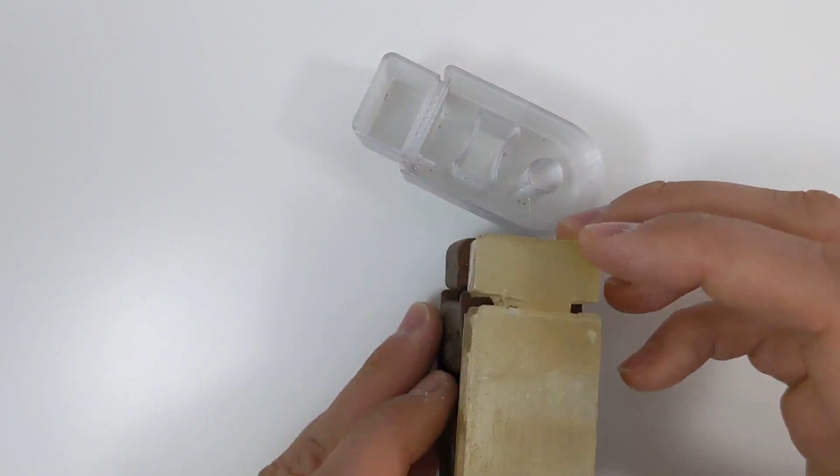And I guess I've given away the punchline. I did it. But I'm going to show you how to do it, because I also made one critical error in my design here. I made the part too thin. You can probably see right there. Oops, too thin. My bad. Most designs aren't perfect the first time, but I did it. I created a mold. Actually, I created this one first, and I cast this part out of it.

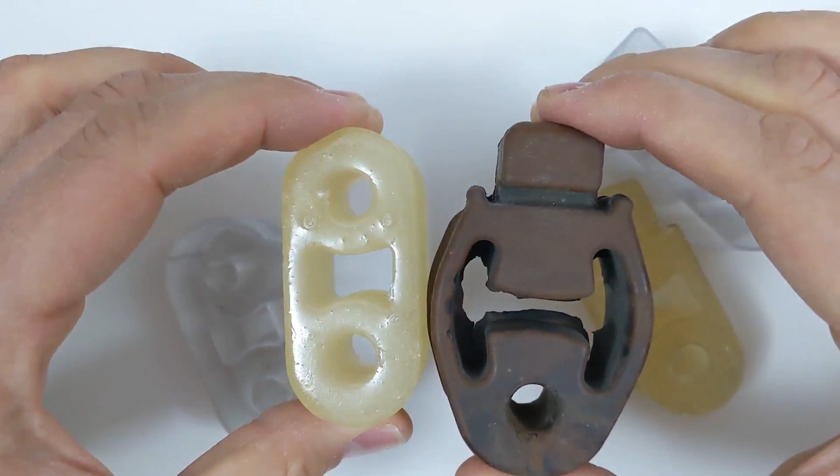I went and found a polyurethane mixture that is roughly the same durometer as this material, actually just a tiny bit stiffer. You've still got some nice flexibility in it, but a little more rigid, and I was able to make it a little bit more low profile, use a little less material than the originals did, because I want less flex. So I'll show you how I designed it, and then I'll show you how I printed it and poured the part, and here we go. This is the shell that I created for that rear exhaust hanger.

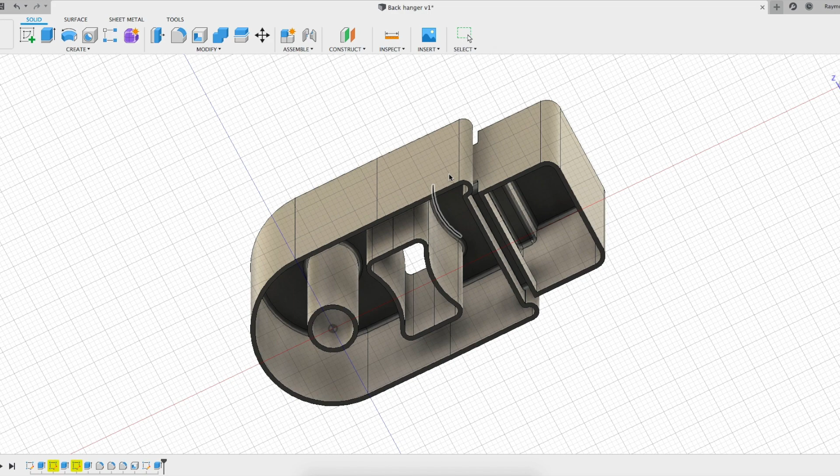Well, looks like a solid part if I look underneath it. There you go, you can see this is the shell. It's got those undercuts here for the portion that you slide up through the frame and then twist to lock in. So that's nice. I'll just roll it back so you can see the method behind my madness. I've got my main sketch here.

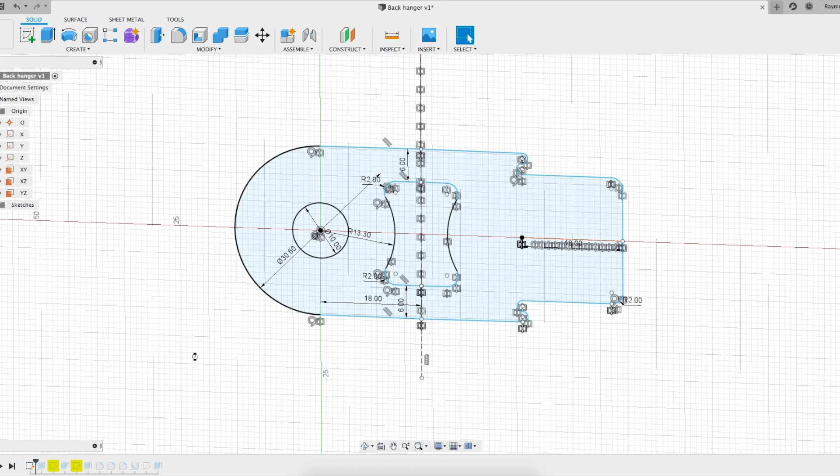I basically just drew out what the main profile would be for that hanger, extruded it, and put some radii on it. Oh, it wants me to finish the sketch. Okay, finish, and drag that over here. Got some fillets. I made that hole a little bit smaller for my second pour here, just to get a little bit tighter fit on the exhaust.

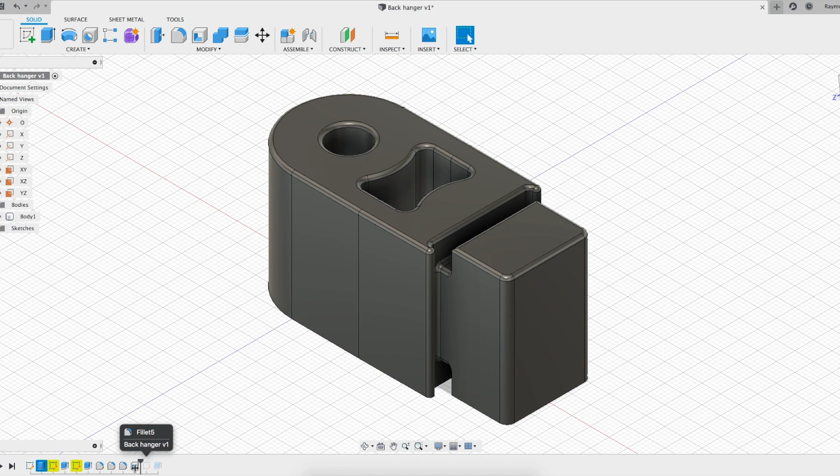And then once you do that, you select the shell function, and I shelled outward with a thickness of 0.9 millimeters. And I selected that main face up on the top, so it just punches that right out. So we've got our shell. But the problem was I've got this second cavity here, and when I'm pouring in here, I want to make sure that air can escape, and I actually would like to be able to pour there.

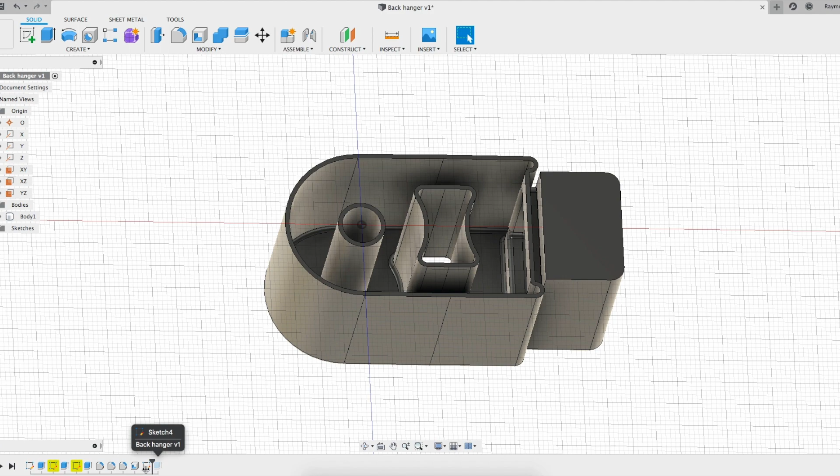So all I did was I created a sketch of that section, did a quick offset. The offset tool, for whatever reason, is hard for me to find. Right there, boom. And then I just did one more extruded cut to punch that section out. And if it will let me, that's right, finish sketch.

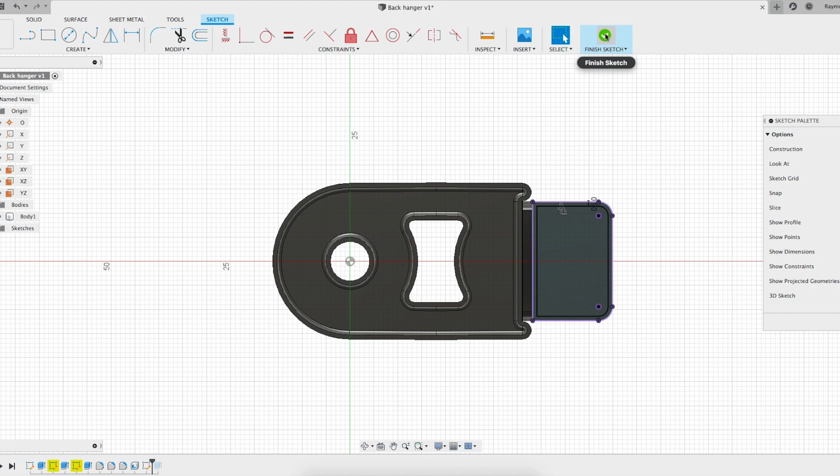I literally learned Fusion 360 last week. I'm always more of a SolidWorks guy. But anyways, it's been a great tool. Actually, I'm more of an Onshape guy, because as you can tell, I'm on a Mac, and Onshape is much better. You can't run SolidWorks on a Mac.

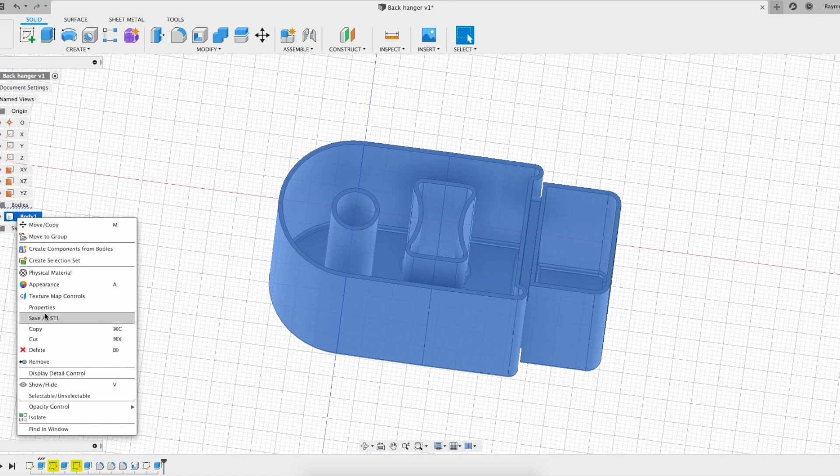Anyways, what I need to do now is save as an STL because I'm going to put it in my print prep software, and we'll just call it rear exhaust hanger 2, and pop it in the downloads. Then I'm going to put it in Cura. We've got our STL loaded of the new shell we're working on.

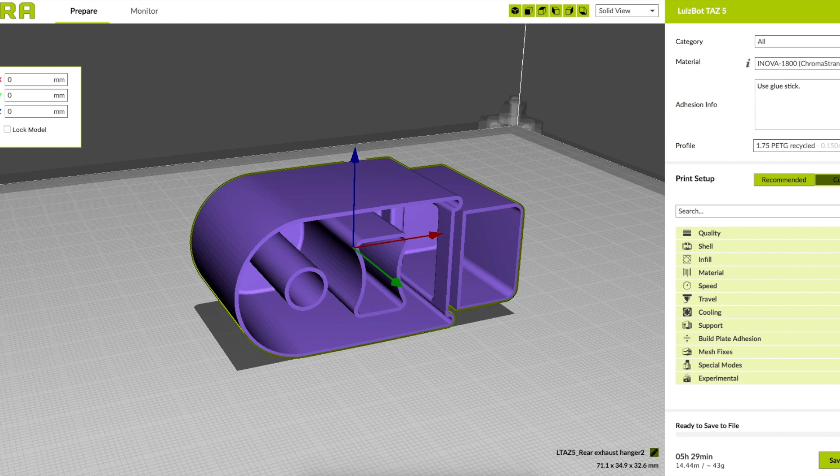This reveals that Fusion 360 in its default settings is one of those strange programs that thinks that Y is up, but you and I know better. So we're just going to reorient it. I'm also going to move it to a 45 here.

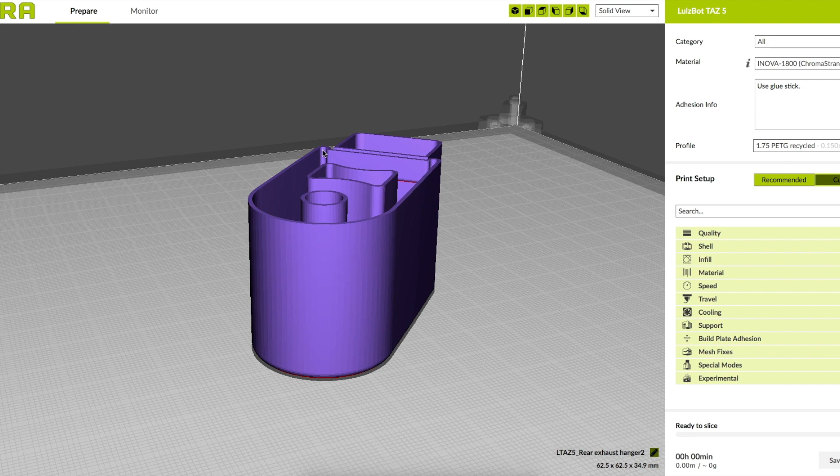And the reason I did that is because of the way Cura likes to arrange its support material. As you know, this bridge that we've got here is a big overhang hanging over in the air. It's going to have support material under it. I've already turned that on. But if you leave it the way it was oriented, it just creates these straight lines going across, and it is a pain to take out. So orienting it at a 45 like this is going to put those at a nice 45 degree, really easy to pop those out.

So a few small modifications. I just went with a chroma strand, which is a PETG, well, that's technically a PET copolymer, but I'm just using that as my base profile, and then I've customized it a little bit. One thing that I've done is I've upgraded my TAZ to run on 1.75 filament because it's just more common, more abundant. You can get more filaments that way. So there we go. Filament diameter I've updated to 1.75.

And then the other thing that I've done is increase that flow rate to 120. The reason I did that is to make the part waterproof. Now that I just did experimentally. I've printed a lot, so I knew, and I went ahead and tested it at 100%. 100% is the basic flow rate calculation: if you move this much, you have to spit out this much material, that Cura does to produce its G-code file. So giving it 120, it's going to be spitting out 20% extra material all the time that it's extruding and moving.

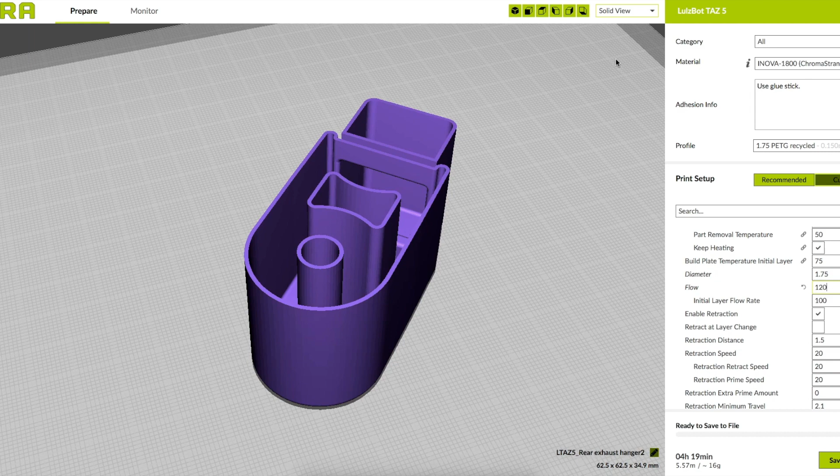The only other consideration here, let's go to layer view so you can see what that support material is going to look like. So we'll scroll down a little bit. You can see that support material right there, and this is what I'm talking about. Now you've got these nice 45 degree orientations. That's going to be a lot easier to get in there with needle nose pliers and just squeeze and pull that right out.

You might be wondering, with increasing the flow rate, does that make the walls a little bit thicker, a little oversized? Yes, but it's such a small amount. And in this case, we're going to be pouring an elastomer into this mold anyways. It's really not going to be enough to be a problem to us. And we redesigned and closed up that hole a little bit, so it should fit really nicely. So here we go. We've got our G-code file. I'm going to save that, toss it on the TAZ and print ourselves a mold.

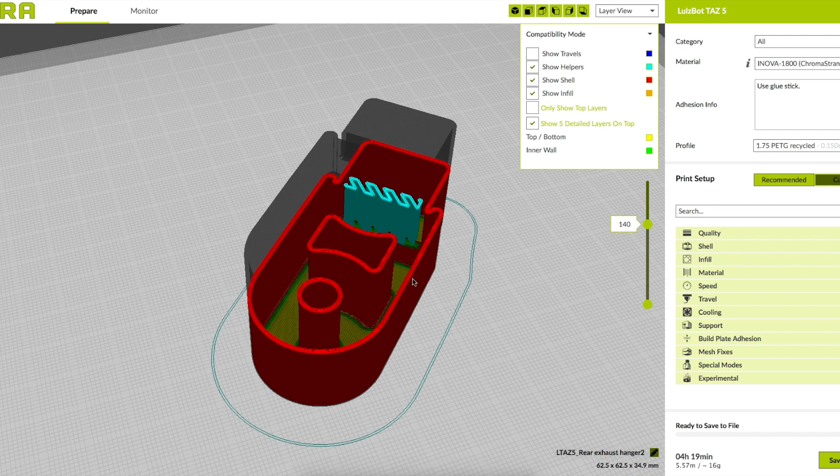So here's that 2-part polyurethane that we're using. It's PMC 770 from Smooth On. You can see it's 2 parts. You've got your part B and part A. According to the instructions, you use two parts of A to every 1 part of B. That's why it comes with 2 bottles of A.

That's pretty simple. So we're going to use that 2-to-1 ratio to design some pouring and mixing vessels, and I've done this in the past. We're going to go design that right now so that we've got exactly the amount of resin that we want to pour in this part at exactly a 2-to-1 ratio. Makes it super easy to get this just right and minimize the waste. Let's go look at that.

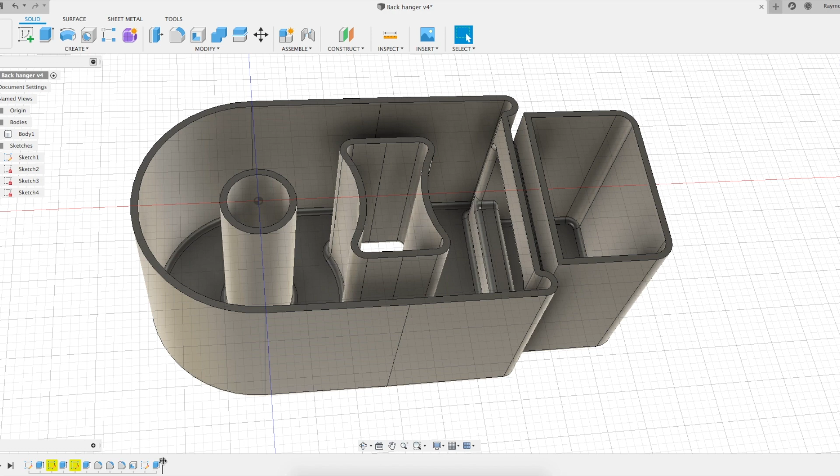The next thing, we're going to want to print one more thing, and that is the actual measuring and pouring cup. And we want to make it exactly the right volume. So if we roll back to just before we did our shell function, this is what the actual part looks like, right? So we want to know exactly what volume this is. That will tell us what volume of material we have to mix.

So I'm going to go to body here on the left, and then we go to properties, and you'll see we've got area, density, mass, volume, 4.352 times 10 to the 4th millimeters cubed.

So I'm going to write that down, 43520 millimeters cubed. I'm going to multiply that by 2 and do a quick bit of math, and we're going to start designing a measuring cup.

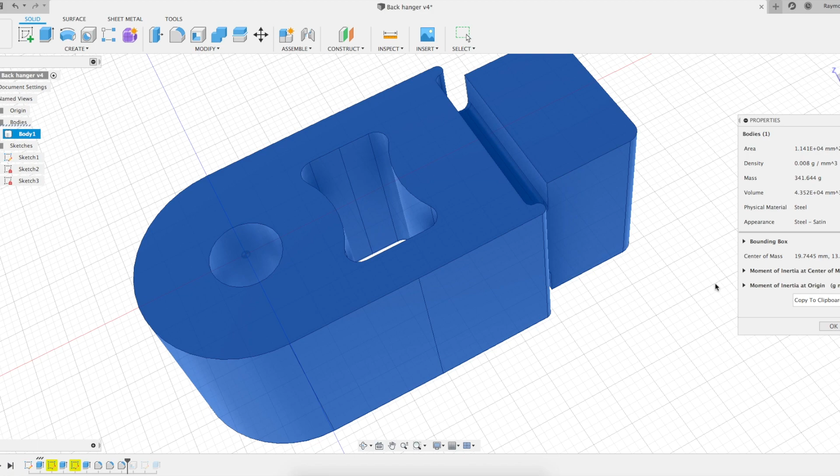Now, just as a reminder, you don't have to do this. As long as you have some kind of measuring devices, cups of some sort that will allow you to measure out 2 parts of part A to 1 part of part B, and you just want to wing it, just mix up however much you mix up, that's fine. I just found it to be a little bit wasteful, and since you only want to use how much material you need to use, this is a really easy and kind of cool way to measure out exactly how much resin you need to use.

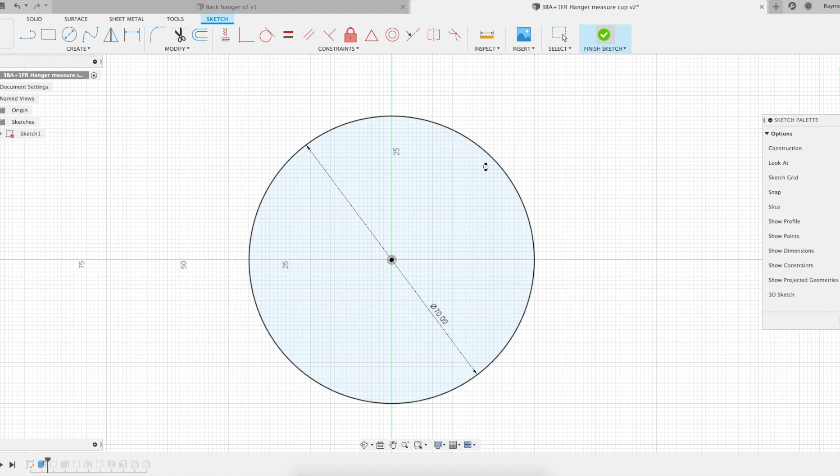So just showing you what I did here, made a simple sketch of a circle. It's 70 millimeters in diameter, and done. And then I extruded that to 50 millimeters, but actually you do a little bit of math, a little pi r squared, divide the volume that we just got. So the volume for the 2 hangers we're going to pour was about 87,000 cubic millimeters. Divide that by pi times 35 squared here, and we get a height of 22.6.

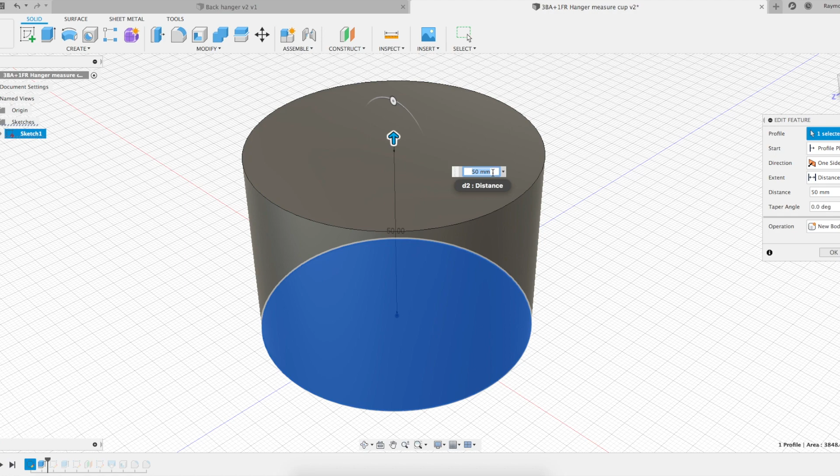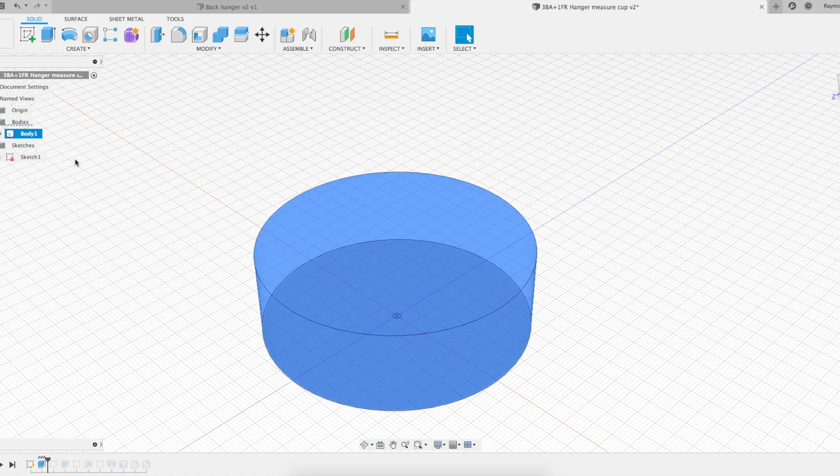So let's go ahead and do that, 22.6, and that is the amount of resin that we're going to need to use. Just to confirm, go to properties here, and the volume is just about 87,000 cubic millimeters. So our math is right on point. So that's exactly how much we need to measure out.

We want a little bit taller glass than that, or taller vessel. So I'm just gonna undo that. I extruded it to about 50 millimeters, so give it about double the height. It's so little material to print this vessel. You're gonna have to pour the 2 parts in, and then you're gonna have to stir it around. So let's make it tall enough for that.

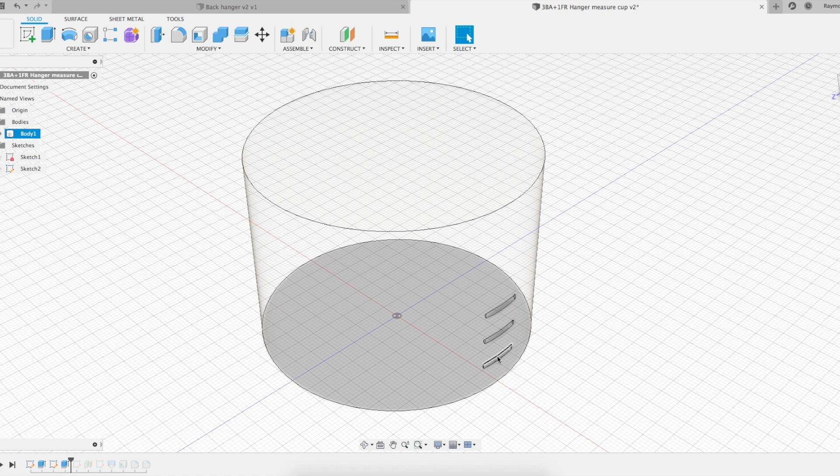I did a little bit of fun here, actually I'll show you. Firstly, we're mixing a 2 to 1 ratio, right? So 2/3 to 1/3. So what I did here, I'll show you this sketch. I just measured along the side, and I went up 7.5, 15, and then 22.5. Those are pretty nice numbers actually, that it came out to.

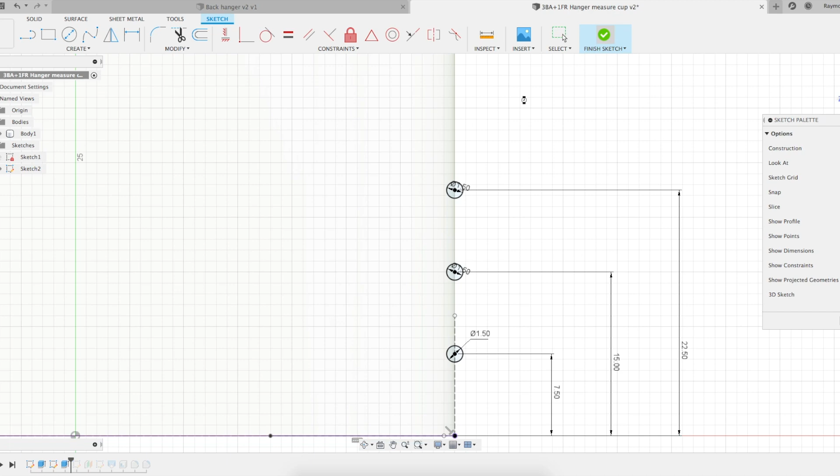And then I made these little circles, and as you can see here, I extruded those circles in both directions. Boom. Just so that it notched out the sides of the vessel that we're going to use. So now we've got those nice notches when we go to print that. I put all 3 just in case I put part B first. I'll just go up to there, and then part A up to there, or the other way around.

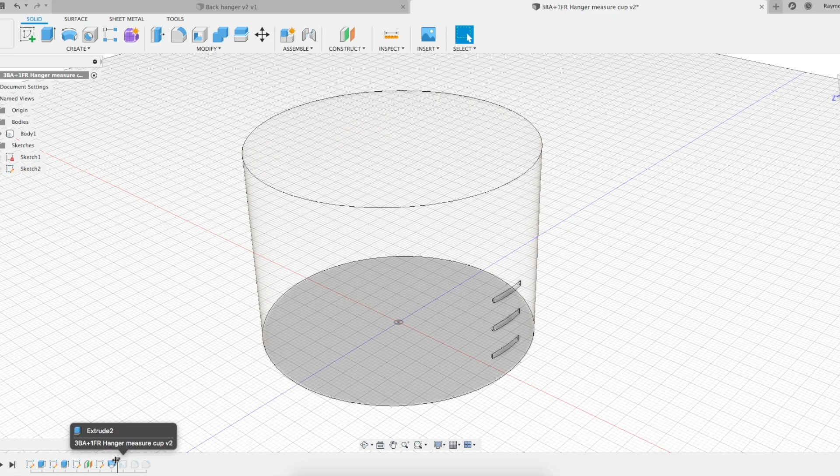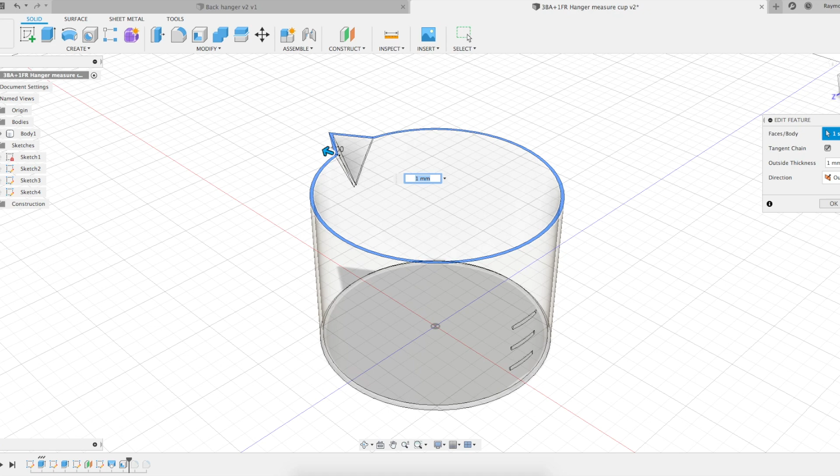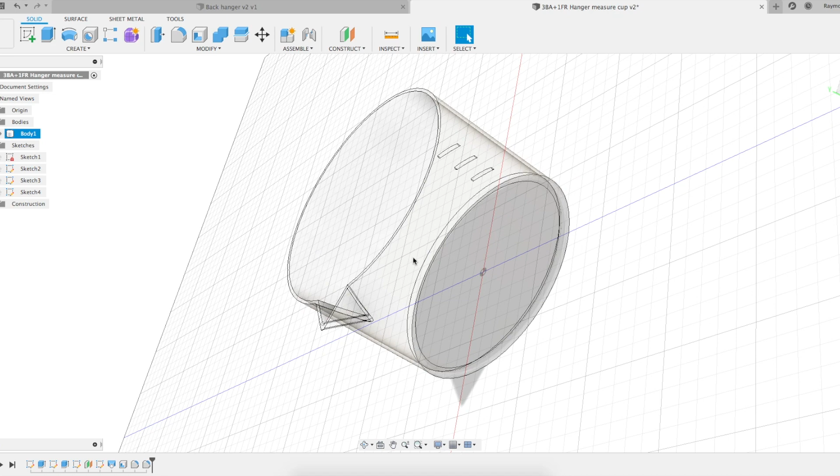I had a little fun here and put a little spigot. I just drew a triangle, a second triangle, I lofted between them, and then I added that to the shape. Now this is all one solid shape, but then you do a shell out. I did an outward shell of 1 millimeter. Since I have a 0.5 millimeter nozzle, I just want a two pass thickness on all of the walls. And then just to be nice, I put some little fillets on the bottom of the inside, and on this pouring spout right up here.

So that's good to go. As soon as the 2 pouring shells are done, we'll go ahead and print one of these, and I'll show you that.

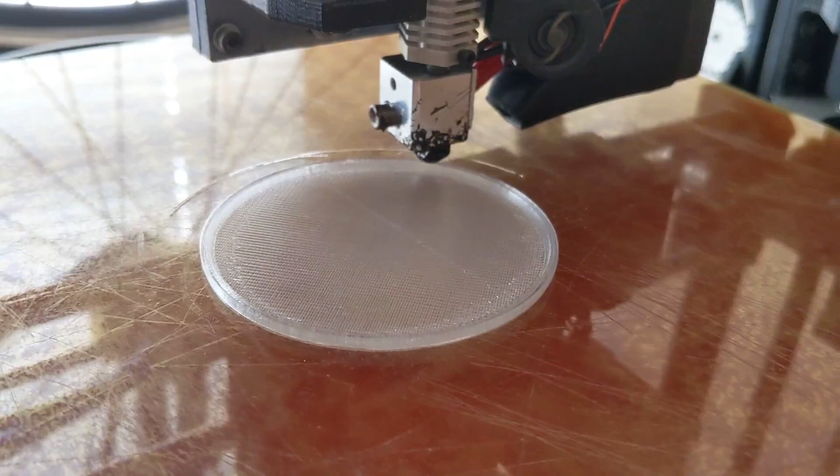Alright, this part is very not technical. Here's our universal mold release agent. Here are our molds. And there we go, we've got those set up there. And we are going to hold our can about 12 inches away. Spray, spray. And you give it a little bit of time, and then you spray it again.

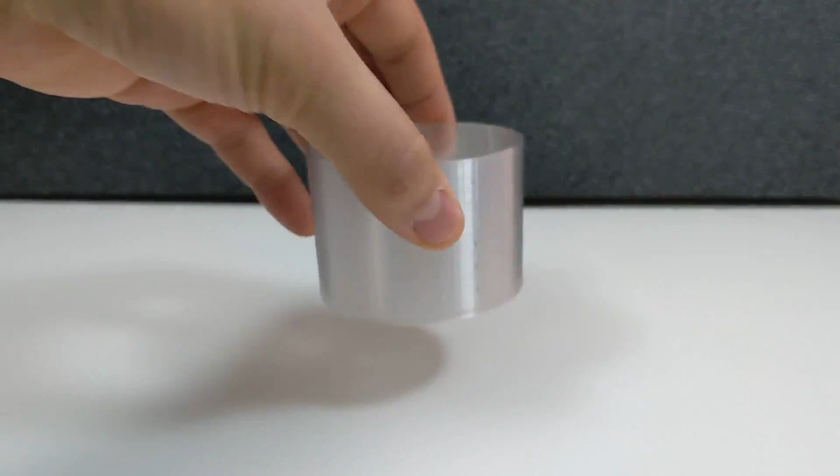Ta-da! Alrighty, we've got our mixing cup done. Here it is. A nice little spout on the front, and we've got our little markings on the side. So there they are. And that's going to be really nice. So let's go ahead and measure out some polymer.

So I'm going to take our part A here, and again the instructions right here say mix at 2A to 1B ratio. So I'm just going to pour up to that second notch there. And we've got our part B. Good to go. Now we're going to do a little stirring. And there we go, mixed.

All right, so now that we've mixed that, we are on the clock. We've got, what do they say? Not even 30 minutes of cure time. So once we've got that mixed, we want to go grab our molds, bring those in here, and start pouring.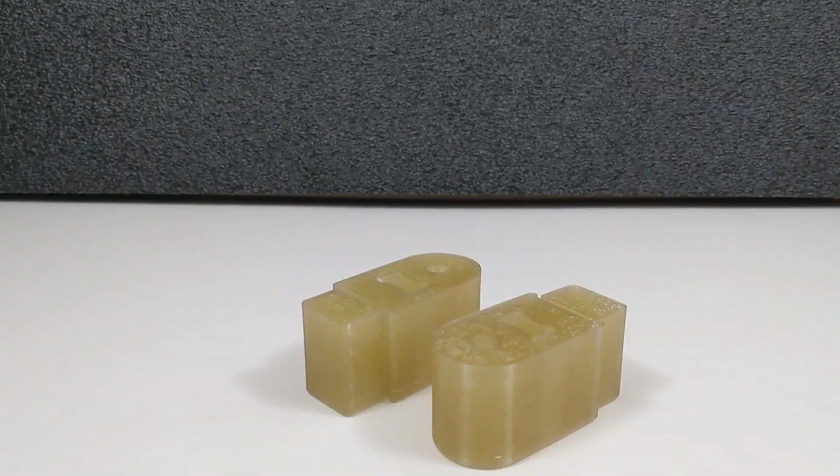We've got our molds filled, and it's time to cure. All right, so these little guys are looking nice and cured. It's been 16 hours. The instructions are really cool. They say that you can give it a post-cure of 4 to 8 hours at 65 degrees. And so you'll see I've got them sitting on my print bed here, and I was just keeping them at room temperature because it gets cold in the garage.

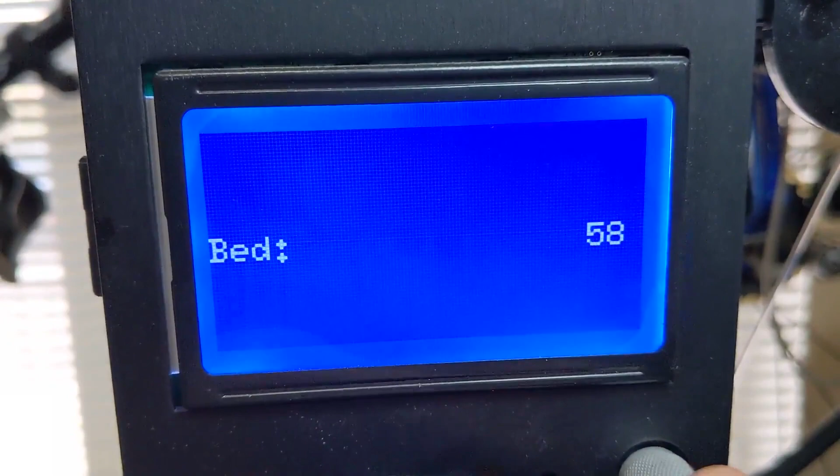Now what I'm going to do is I'm going to take that bed up to 65 degrees, and what this is really doing is curing anything that's not fully cross-linked. It's going to heat it up and it's going to fully cross-link it. I'm also going to throw something on it to cover it up, and I'll probably rotate them, flip them over just like baking cookies. And then let's see how that does.

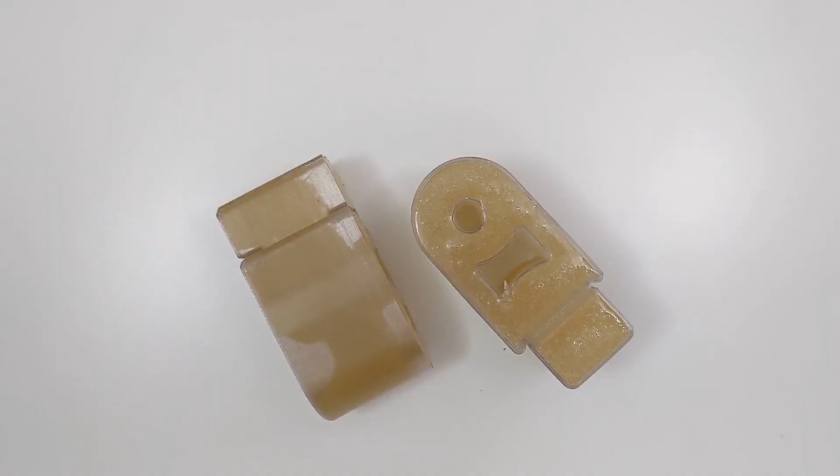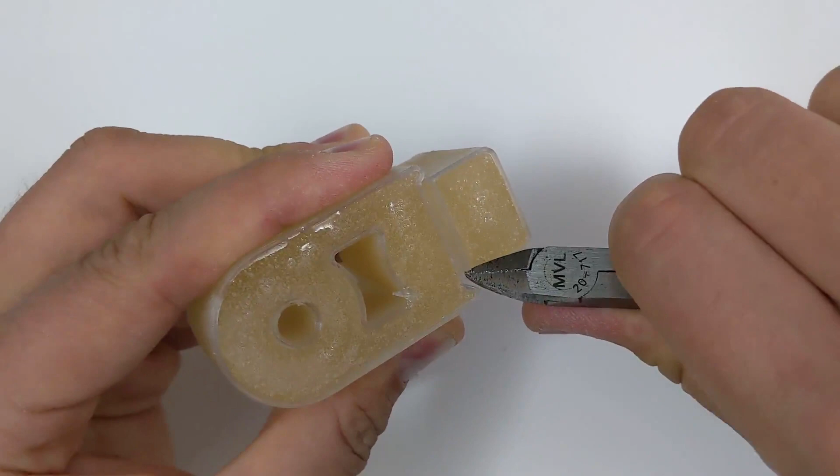Alright, so here they are, fully cured, and they're ready to come out of their little shells. So the main way I do this is with some wire clippers, and the most important thing is we're going to have to get rid of this little bridge that's over here. So we're just going to clip into that. I'm trying to be careful. This is the kind of surgical part where you don't want to cut the actual part. I've done that once now, and it was such a bummer. So we just want to clip very carefully around it.

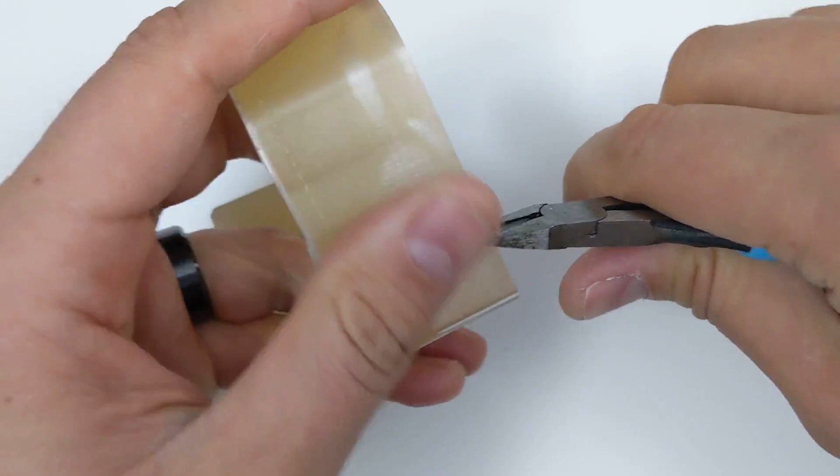And what I'm going to do is I'm going to clip down this seam. So I'll get inside between the actual shell and the part. And we're going to clip our way down until we can get to the bottom, and then once we've exposed the bottom, we can pretty much just pop the part right out. Okay, so here we go.

We've gotten through the sidewall here, and we've gotten that little bridge piece out. Let's grab ourselves a little bit of prying action. And now we find out how well our mold release did. A little more mold release.

Okay, let's try this. We're going to try to push these guys through with some needle nose pliers. I'm going to spread the pliers apart while I push. There we go. Look at that. There goes that piece. I'll just push them through here. There we go. Last little piece here. And there we have it. There's our part. I'm very excited.

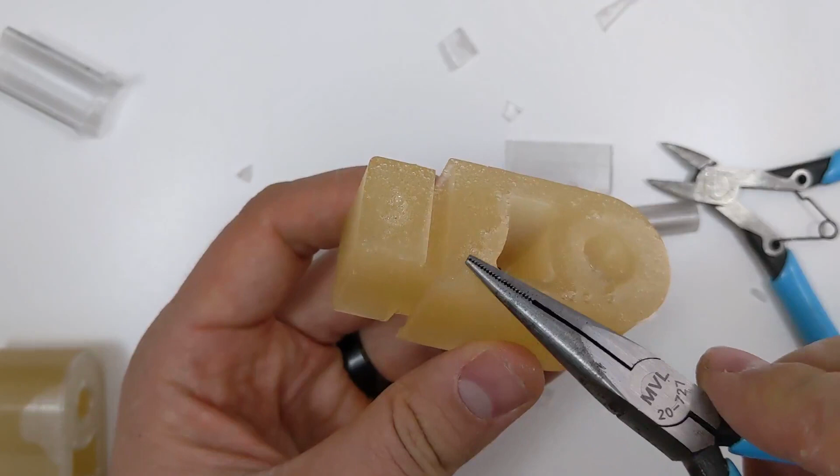It's looking great. Looks like it came out with just the geometries we wanted. It does have some bubbles on the top, you can see here. Some of the air bubbles do come up to the top. You could put it in a vacuum while it's curing, but I don't have one of those, and I don't really mind it all that much. It's got a nice flexibility to it, but it's still pretty sturdy and rigid. I'm going to go ahead and break the other one out, and then the moment you've all been waiting for, does it fit on my car?

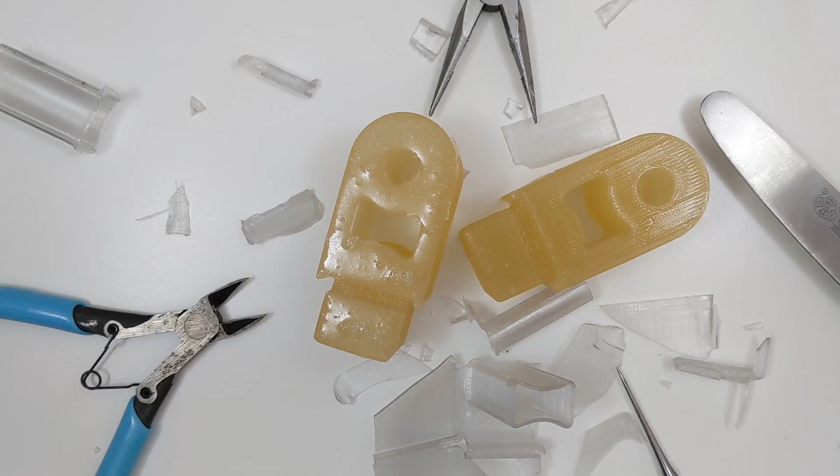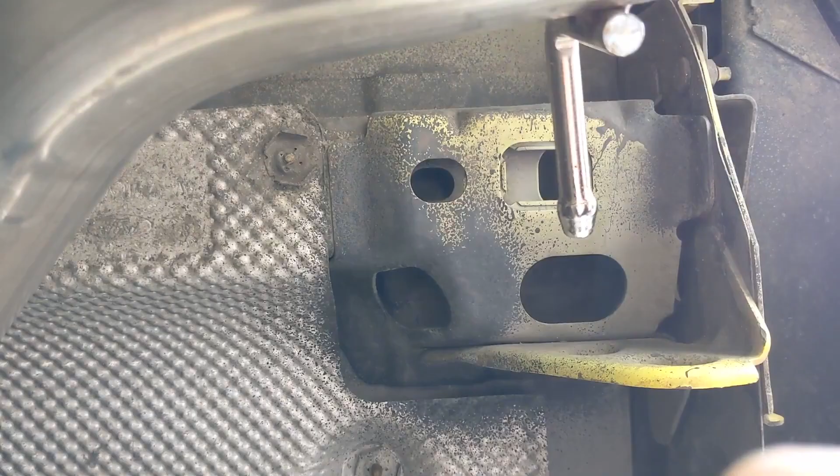Alright, I just got that second one broken free. Before I throw it on the car, I just wanted to make a quick note to all of you, since this is kind of a DIY video. I've been using sharp things, pointy things, cutting things, things that can squeeze your fingers. Take caution, be smart. I wear glasses, so I have glasses on all the time. I also have been dealing with polymer resins. Wear gloves if you feel that's necessary. Just wear gloves. I didn't. I apologize. I should have. And you should too. Be safe, do cool things, and keep doing cool things by keeping yourself safe. All right, just want to say that. All right, here we go.

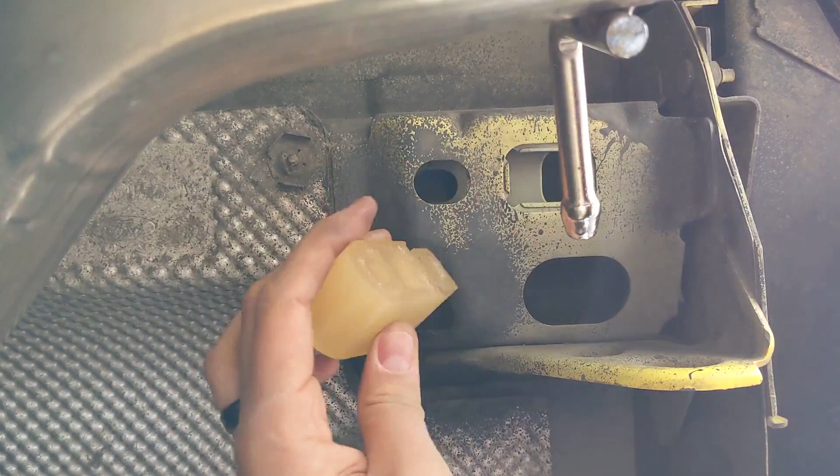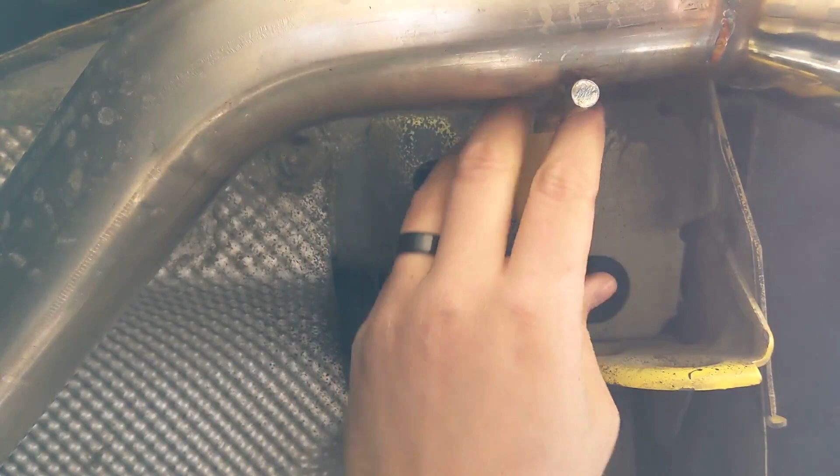Okay, so here is our part. That's the hole it goes in. So this square part on the bottom just pops right in, and you twist, and it locks in ever so nicely. Here is the piece of the exhaust that we need to get in there. This part takes a little bit of wiggling, a little bit of praying, and there we go. Woo! All right, and that is a successfully installed exhaust hanger.